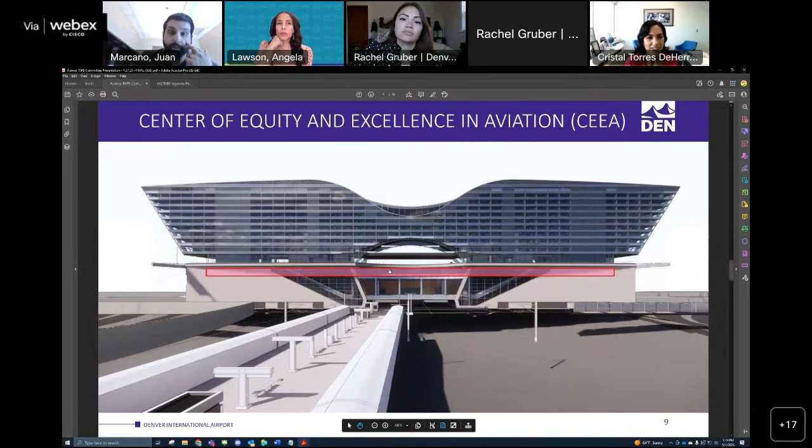Cristal, can you hear me? Sorry, is it okay if I jump in real quick? That last map actually addresses one of my questions. Are you familiar with the disruptions to the R line? I am aware of that. Have you all reached out to RTD about that yet? We issued a resolution, and I know the subcommittee of Cog that I'm on for Arapahoe County is going to be weighing in, but I think your voices would be very important because the R line basically services the orange and red portions of Aurora here. Our CEO resides in Aurora and rides the train into DEN, so we also experience it at that level. We're happy to partner—we have a great partnership with RTD, but it's such a big impact to our workforce. Happy to think about ways we can be helpful there. We have a lot of different stakeholder meetings with RTD that we're currently engaged with, so we're happy to be a partner in that front. It's very important to us. Okay, great.

So you haven't issued any formal communication yet, but if you're interested, I'd love to work with you all on that. We'd be happy to loop into that. We've had conversations, I just don't think we've sent a formal letter, but it's something we're definitely happy to partner on.

Councilmember Marcano, can I jump in real quick? Cristal, thank you for that. Didn't mean to interrupt, but just to tag onto that.

Since you guys have quite a few employees working at DEN, I'm hoping that anything you can do in terms of the TMA, something to make sure we have some type of transit, because we're building so much out there, and people who either work in the inner core or are coming out to work at DIA or the manufacturing areas sometimes don't have the capability to get to work. You have to go through all these hoops and hurdles. So I really hope with DEN being such a powerful organization that you could be impactful on some of these associations as well.

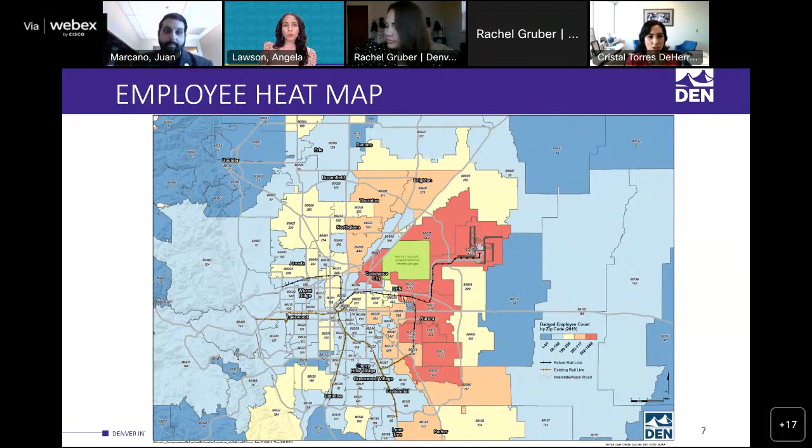Wonderful, thanks for letting us interrupt. Hey, this is good, I'm happy to have the interaction.

So don't hesitate. What I wanted to show here is the Westin Hotel, and this horizontal red rectangle is where the Center of Equity and Excellence in Aviation is going to go. To our earlier conversation, it's so powerful. We are very intentional, there's 70,000 square feet of space we are building out underneath the Westin. So when you come in off the train, or you're on the plaza...

Maybe you're out here for a little putt-putt golf or a summer concert that we host. Underneath there are 70,000 square feet of space we're building out for the Center of Equity and Excellence in Aviation. We purposely put it on the rail line, on the bus line, in the Hotel Transit Center, because we want it to be accessible. We recognize that a lot of the workers or students we bring in are going to be frontline people who aren't going to be able to afford jumping in the car, spending money on gas, paying for parking.

No, we wanted it to be really friendly and really accessible. We are also going to have on-site childcare, because we're very cognizant that people are coming from all walks of life and we want to remove barriers. So whether it's a single mom or whatever the situation is, we want folks to be able to use this resource to jumpstart their career in aviation, and as I mentioned earlier, build that global powerhouse for aviation talent.

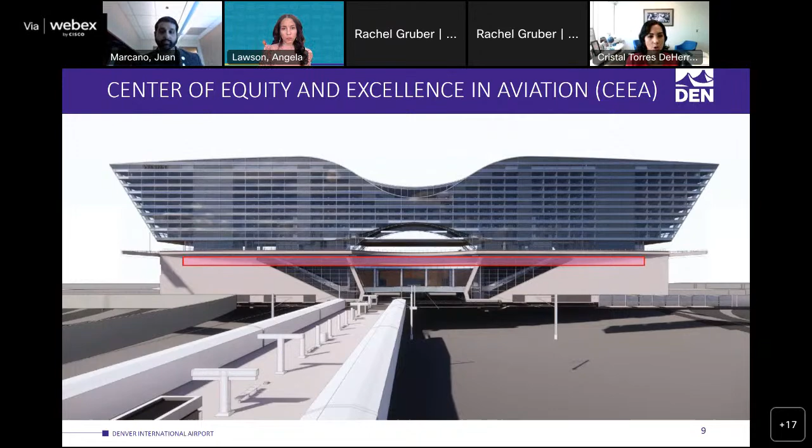So, equity and infrastructure projects - you heard me talk earlier about how important it is for us to get small businesses to create generational wealth in our communities, and the large number of small businesses generating from Aurora. Our CEO, Phil Washington, and John Porcari, the former deputy secretary of transportation, together launched the Equity and Infrastructure Project.

This is all about walking the walk, holding transportation industries in all modes, not just aviation. We're talking transit, ports, all the different modes, to say hey, we are not just running subcontractor programs. We need to have a path for small businesses to become primes. By being a part of this, we are going to commit to double the number of prime contracts we awarded to historically underutilized businesses in 2025 as we did in 2021.

So we've undergone a very extensive baselining effort. We said, okay, how many prime contractors that historically underutilized businesses did we have in 2021? And we need to now create the path to get to 2025 and double that number.

So what does that mean? It means we've gone through with painstaking detail all of the projects we are anticipating, and said we need to set aside and make sure we know we're going to have these opportunities for people to prime it. And we're tracking it on a dashboard, so that if perhaps one project doesn't yield the results we're hoping for, we've got to make up that difference somewhere else. This is a really big deal for DEN and for the country, for all transportation in the country who has signed up for this. So this is very exciting for us, but it is certainly somewhere we are pushing the industry to do more.

Again, moving 100 million annual people through here, we have to clear out those security checkpoints that are currently on the floor and bring them up. Not only is it safer for people, so you don't have unscreened people able to look over and do something, it's also going to open up movement of people, and we want to really make sure we're giving back to the people their terminal.

And so we're going to have restaurants and lounge space and a child play area and places for people to actually come and relax and enjoy the airport in a totally different experience, all while moving security up and getting new security equipment that is faster, more efficient, top of the line. We are going to be the first post-pandemic security checkpoint opening in the United States. That's a big deal because we were able to learn some interesting lessons through it with TSA, and we are definitely breaking some new ground here.

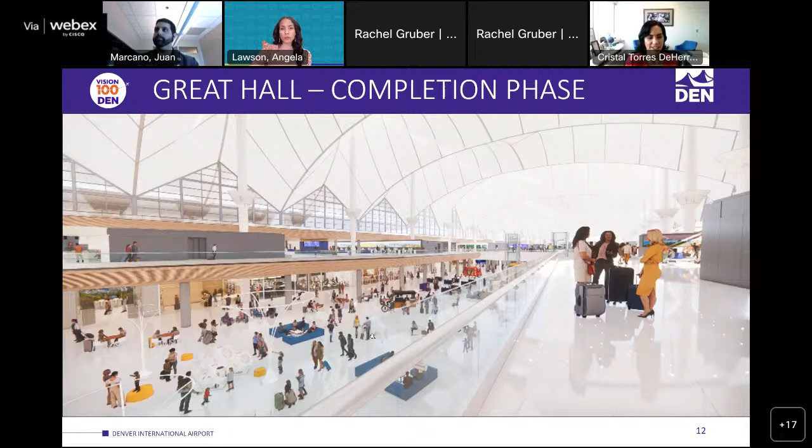Let's go to the next slide, please. Next slide, please. Oops, we'll go back just one.

The slide we just passed over is the gate expansion project. We had a decision point during the pandemic when there was literally nobody in line except for me and a TSA agent looking at each other. It got really slow at Denver for a period of time. So we decided as an executive team, now is the best time possible to double down on our construction and just go. Let's do it while the people aren't here and let's just go faster.

So we opened up 39 new gates at the airport last year. That's huge—that's like taking Reagan National Airport and dropping it into DEN, boom, a whole other part of the airport. Because of the layout of our concourses, they just go straight out, so we were able to build off the sides. That's such a great advantage because most other airports in the United States can't do it—they're landlocked. This is where our land, and all the land that we have, is such a huge asset.

But it's been great to see how we've also been able to get new furniture for our passengers, new nursing rooms, charging stations, and outdoor patios on the outsides of the concourses. If you have not gone to the outdoor patio, you absolutely need to, because this is how, as we remodel the concourses, we're upgrading and modernizing the facility and what it will look like.

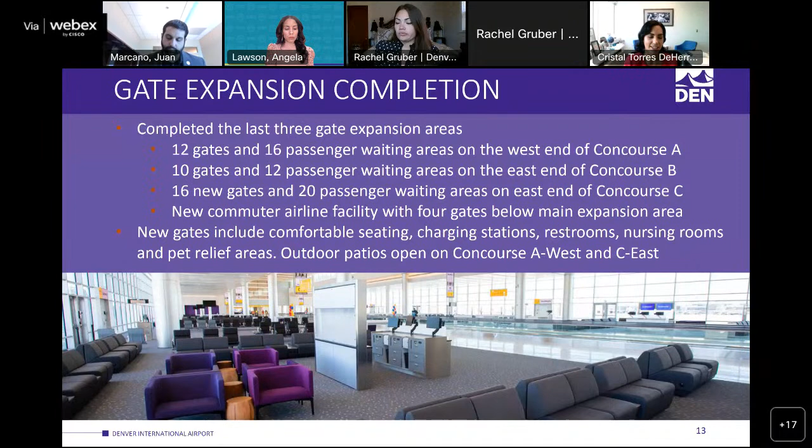Maintaining what we have—this is all about asset management. Let's go to the next slide.

So this is really just a snapshot to give you a sense of the scale of what we are maintaining at DEN. We have over 8.2 million square feet—7 million that we had prior to adding 39 new gates, now 8.2 million square feet—to oversee the 6 runways. We've got the largest runway in North America. People forget that we've also got a very long driveway with Pena Boulevard.

So we've got 300 lane miles of roadway, 34,000 parking spaces, and 6 public parking lots. And then, something more of us who come through Den are familiar with, the 320 escalators, elevators, and walkolators that are always on and have to always be operating. If we're doing maintenance on one, we have to make sure all the others are working. So we're replacing 90 of those by 2025 because, as you can imagine, many are original to when Den was first constructed, so they're in need of some TLC and replacement. And then, of course, 100 restrooms, which we're renovating in the terminal and on the concourses as we go.

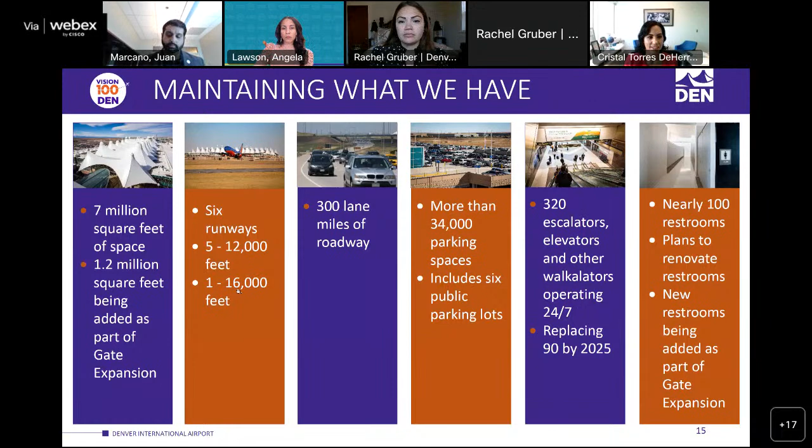Next slide, please. So with that, I just wanted to say thank you and open it up for any additional questions.

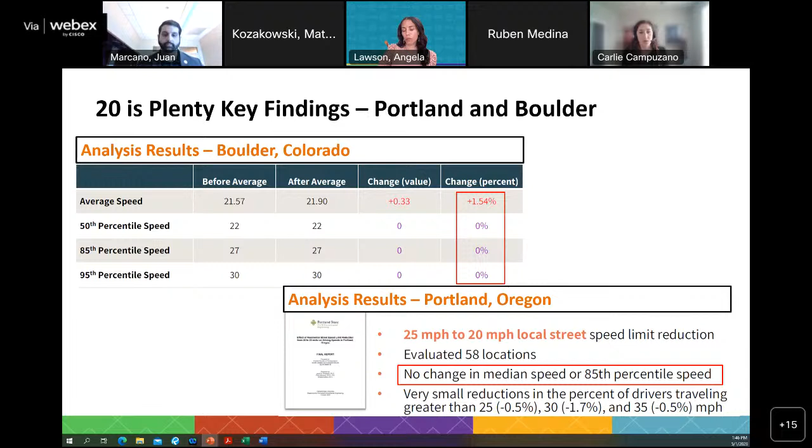The key takeaways from that previous presentation are that in municipalities where this initiative was adopted and speed limits decreased, changing speeds alone did not impact driver behavior. What we're seeing is that street design has more of an impact on vehicle speeds, and that severe crashes aren't really happening on local streets — they're happening on higher speed, multi-lane facilities like arterials. Those were our key takeaways from January, and coming out of that, with feedback from you all, we wanted to dive more into this topic. That's what we're planning to continue with next.

Getting more into safety and speed foundations, I wanted to cover the 3 E's of road safety: education, enforcement, and engineering. This was a concept developed about 100 years ago, as a way to simplify and explain the complex foundation of roadway safety and the different factors that play into it. First we have education, which is really about providing information to increase driver awareness and hopefully motivate people to change their behavior.

Some examples of education include different sorts of messaging. You might have heard one of the bigger campaigns of the 90s, Click It or Ticket, which was a safety campaign — that falls into this category. There's also different types of public art, community meetings, distributing yard signs, and at the city we distribute information through the city's social channels. There are different strategies within education. Next we have engineering, which is changing the physical characteristics of the built environment, and that's really what we're going to focus on more in this presentation.

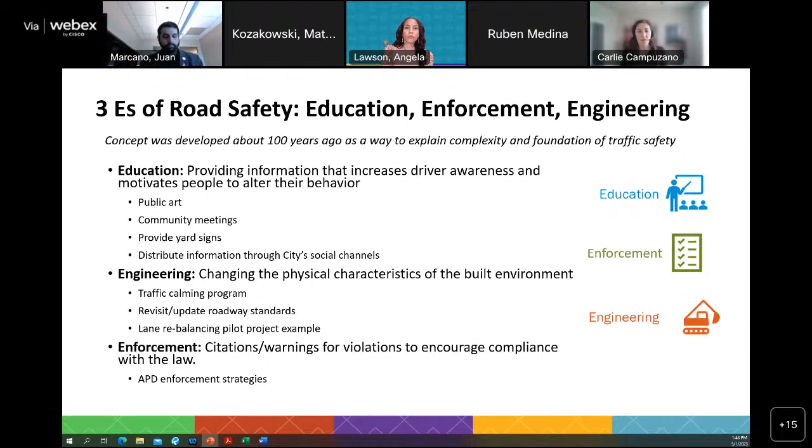These three are the main pillars that have been in the industry for a very long time. You can think of them as legs of a stool—if one of these isn't in place, the stool isn't going to be stable. You really need all three to have good traffic safety fundamentals. That's the higher level information on the 3 E's and roadway safety.

Next, I'm going to describe some of the findings from Denver's speed limit reduction feasibility study. They did most of the work in 2021 and 2022, engaging a consultant to help out and holding multiple stakeholder meetings. We were involved pretty heavily on the city side as well, brainstorming strategies and coming up with different items that ended up in this final study and the recommendations.

Denver evaluated a lot of different strategies, still based on those 3 E's we just talked about, and also divided them up based on roadway type, knowing that not every strategy is going to be as applicable on different types of roadways.

The different roadway types Denver utilized were: first, neighborhood streets; then arterial and collector streets; what they called safety zones, which could represent school zones and construction zones; and then slow zones, which are special designations or business districts. Chair Marcano, I know you had questions about business districts last time—that's what would fall under what Denver classified as a slow zone.

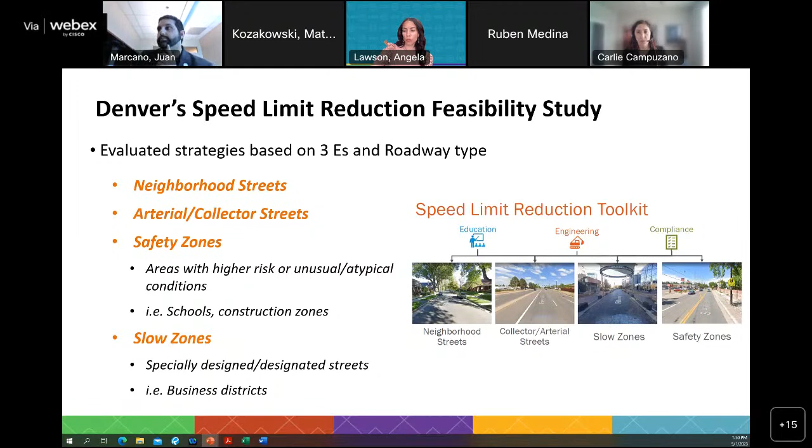For each of these different roadway types, they came up with a table of different strategies. I'll show you a little of what those looked like. I'm not going to cover all of it in depth, but I'll go deeper when we talk about the Aurora recommendations. So Denver developed different tables of strategies.

Resources and cost play a big role in figuring out what we can do and how quickly. A lot of the strategies are good, but when you look at your fiscally constrained alternative, the price of things—even just signs—adds up. That's how Denver tackled it.

But Denver is a very dense urban area. There are different downtown considerations—they have their Wash Park district, different areas of urban design, which are just a little different than our characteristics in Aurora. They have some similarities for sure, but definitely some differences.

Looking at all this, and after talking to you all last time and getting feedback, at the staff level we went through a lot of those Denver strategies and the feedback we've received from you all, from our constituents, different residents, and commuters that call in, and came up with what we think should be our good strategies to roll out in Aurora. Knowing the different types of Aurora land uses and different considerations, but still building on that groundwork and foundation that Denver already spent a lot of time and effort preparing.

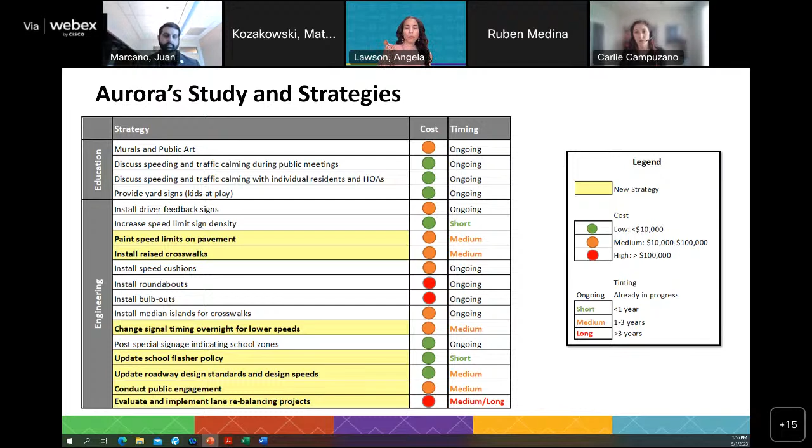So those are some of our ideas for Aurora and what we see as items that we really should look at progressing and moving forward with.

Now I'm going to get into more details about an example or pilot lane rebalancing project. This was also requested as part of our last TAPS meeting, so I'll provide more information on that.

So we looked throughout the city for a roadway that could be a good pilot example for some of the different things we could do with that width to repurpose it. And the roadway we decided to show for this is Yale, from Nome to Vaughn.

Yale is currently a 4-lane minor arterial, with a painted median and a 40-mile-an-hour posted speed. We chose Yale because traffic volumes were relatively low, and even though it's a 4-lane section, we were confident the number of through lanes could be reduced here, showing an example that could be feasible. That was another reason we selected Yale to start with, and it also provides access to Westerly Creek.

There are some on-street bike lanes toward the eastern end of the corridor, but they're not sufficient length and they just end. That's another reason we thought Yale could be a good area to look at for some pilot examples of a lane rebalancing project.

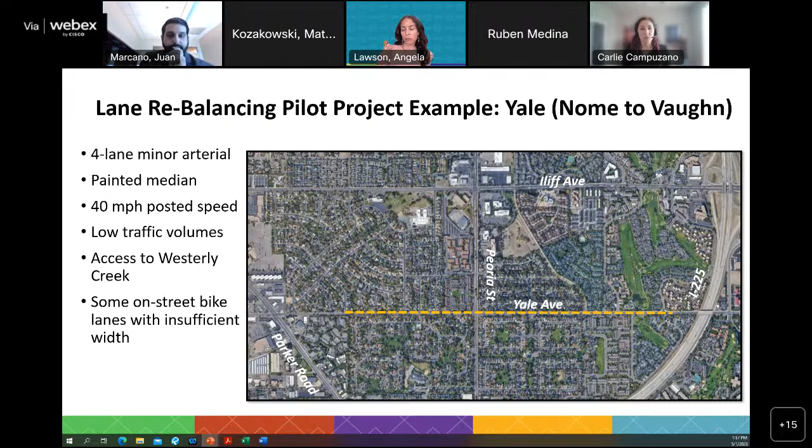So what we did is develop 3 different alternatives to show as ideas for what we could do with the extra space. I called them alternatives A through C. For each, you'll see the existing cross-section on the left and the alternative cross-section on the right. One thing to note is we kept the curb-to-curb width the same for all of these, because moving curbs makes projects really expensive and impactful, both for drainage and utilities.

Another thing to note is we show sidewalk installed on the south side of Yale. That's because we already received grant funding for a sidewalk project that Councilmember Marcano has supported for years now. So we showed that as well in each of the alternatives.

The existing section has 4 lanes, part with a painted median and part with turn pockets developed. The first alternative shows a buffered bike lane on each side. We took a traveled lane and put in a 6-foot bike lane along with a buffered area instead. The buffer could be different things—we just decided to show posts, but it could be Westerly Creek style with a curb or something else.

The next alternative is a cycle track, with bidirectional bike traffic on one side of the street. We'd actually have enough pavement width to do alternative A on both sides, but this shows that if we were really constrained on space, one way to save a few feet could be this type of treatment, although it would make intersections a lot more complicated to get people through.

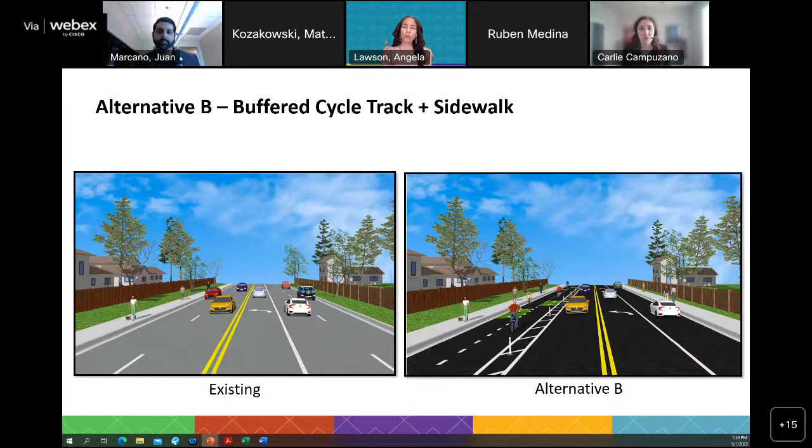The last alternative is buffered bike lanes with a raised median through part of the corridor. We'd probably need to break it for the turn lanes that are there, and we'd need a bigger traffic study to know how long those turn lanes need to be. This is one option, and definitely the most expensive since there's more civil work involved, but it's something else that could be done with the space. So those are the 3 alternatives.

I also wanted to show a couple examples of roundabouts, since that was requested coming out of the last meeting. This sketch shows what we call a compact or mini roundabout on Conservatory. We recently put a few roundabouts out to bid, and this is one we've actually finished the design for and plan to construct.

Where we're constrained by right-of-way and have a roadway section with maybe a lane in each direction plus a bike lane, one option is these mini roundabouts, which have mountable splitter islands and mountable center islands. This is just one example. Cost-wise, these are still pretty impactful since we're moving curb lines, and from a right-of-way perspective we're sometimes constrained because we're trying to deflect people so they make that circular movement. But this is an example that could be implemented on different roadways with a single-lane roundabout.

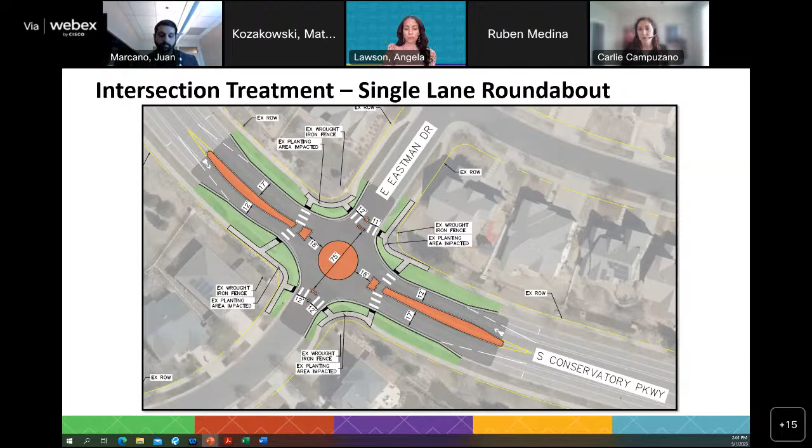We wanted to generate a graphic showing what a multi-lane roundabout could look like. This is just a rendering, and design-wise it's not perfect, but it shows that we could have a multi-lane roundabout on a roadway like Yale if we did need travel lanes in each direction, and that could still improve overall pedestrian safety and decrease speeds.

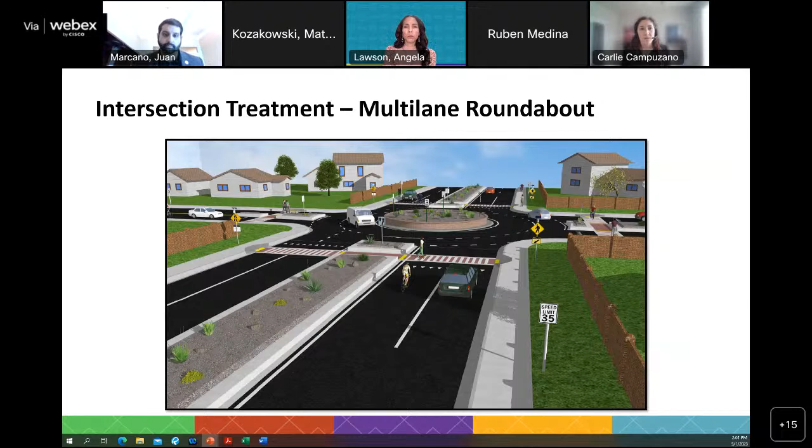I wanted to get into a little bit on pros and cons with roundabouts. I think the benefits are crash reduction and safety improvements. There have been a lot of different studies that show roundabouts are much safer than stop-controlled intersections, and they can be safer than signals as well, with fewer conflict points. They provide traffic calming and traffic operational benefits, and there are placemaking opportunities to put different art, sometimes in the center, depending on how much space you have to work with.

Some of the cons: I think the main con is cost. Roundabouts tend to be very expensive. They can have utility impacts, and you generally have to impact curb lines to design even the smaller ones. Our compact roundabout examples are estimated at about $500,000 each, which is still pretty pricey and almost the cost of a signal. Larger roundabouts could be $1 million to $2 million. We have a larger roundabout we just put out to bid, constructing this year near Regis Jesuit High School, and that one came in at over $1 million — a pretty large roundabout.

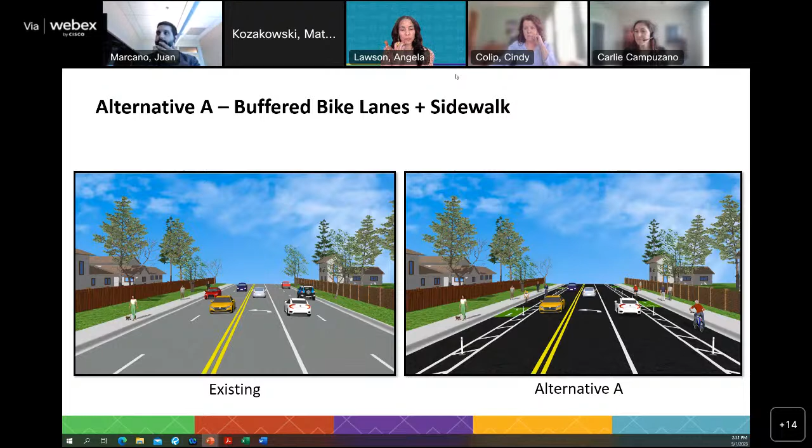Well, thank you so much for this presentation. So there's not a direction from the committee at this point, but I do like the idea of a pilot on Yale. Is that something you'll come back with at a future date?

For Yale, our plan was to rely on the multimodal master plan to inform which roads we should look at, because we want to make sure what we do first is prioritized citywide and makes sense from our bicycle network standpoint. So maybe it could be an earlier step if we do the bicycle master plan first as part of that effort, to look more into those. We'd also need some consulting help to get that done.

I'm hoping that as part of our transportation master plan effort, we'd also have an idea of costs for future budgeting, because all these strategies will come with some costs, and they could even come with signal implication costs whenever we're changing lane configuration. So that was our thought, to really tackle that during the master plan effort, if that makes sense.

Yeah, for sure. Can you remind me the timeline on that again? We're going to kick that off this summer. The request for proposal is out now, so we'll probably have it awarded to a consultant this summer, and then they'll start in on all the data collection. I think they're going to utilize different big data sources citywide, hopefully to define our existing conditions.

Once they have the existing conditions defined, I think they'll roll into the next pieces, so we'll probably have more information on our bicycle network and those elements next year. A lot of this year will be taken up by existing conditions and data collection, if that makes sense. Yeah, no, that does. Thank you.